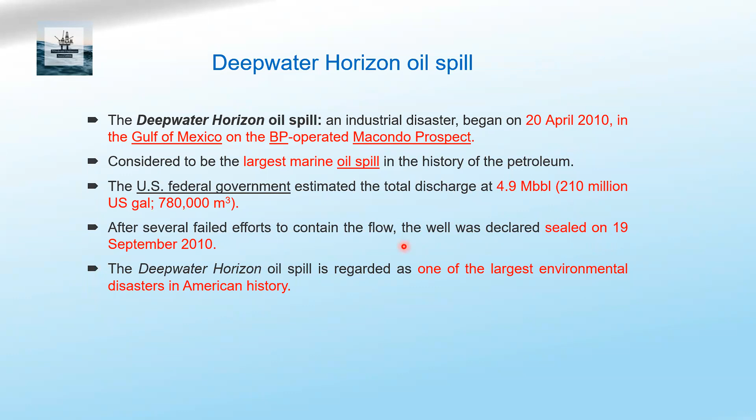And it took almost 5 months to completely seal it, and even after this, it was said that it was still leaking. But officially, it took around 5 months to control this well. Given the money, the effort and the contamination it caused, it's one of the largest environmental disasters in American history.

And so what went wrong? There were various reports that the government put into it. One of the main reasons was the defective cement on the well. I'll just come back again to the previous slide. As I mentioned here, one of the reasons for a good casing is to protect, and the cement is to protect the communication between the hole, or between the well, and the formation. If the cementing is not done, if there is a leak, then this is one of the reasons that could have led to that blowout.

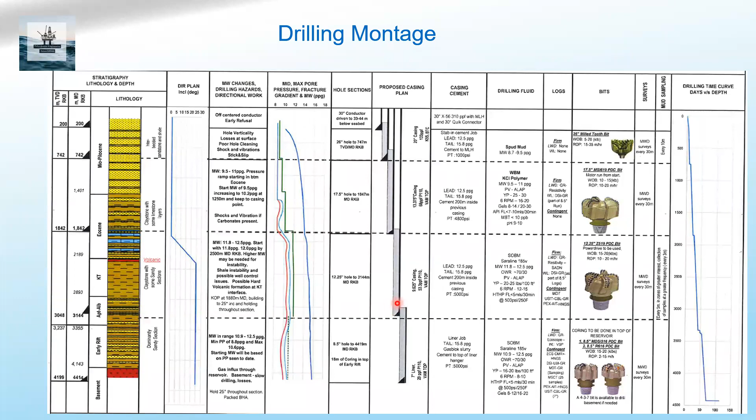There is a certain cement setting time. Once the casing is done, once cementing is done, depending on the temperature, depending on the grade, there is a certain time which we normally call WOC, wait on cement. That cement should not be disturbed until it is hardened. So there is some procedure that has to be followed. That was one of the reasons that was pointed out.

Second is also on the operator Transocean, which was the rig, and contractor Halliburton. Why the word Halliburton here? They were doing mudlogging. So you might have seen the report, you might have seen the chart. There was also some communication gap between the drilling crew and the mudlogging crew while monitoring it. There was some complexity in monitoring it, transferring of the mud during all this influx. So certain SOPs, the standard operating procedures, were not followed. So it led to a lot of confusion, which also resulted in the failure to recognize it at that particular moment and take the necessary action at that particular time.

Apart from all this, we had a fatality of 11 workers whose lives could not be saved during that blowout evacuation, with 126 crew members on board. So unfortunately, we lost life, we lost assets, and we caused a lot of contamination in the sea or in the ocean. And the penalty given was around $20.8 billion. This is the largest corporate settlement in United States history. So what did we learn from here? What did the industry learn about the different procedures, the government guidelines, strict following of the guidelines, and not compromising on the SOPs?

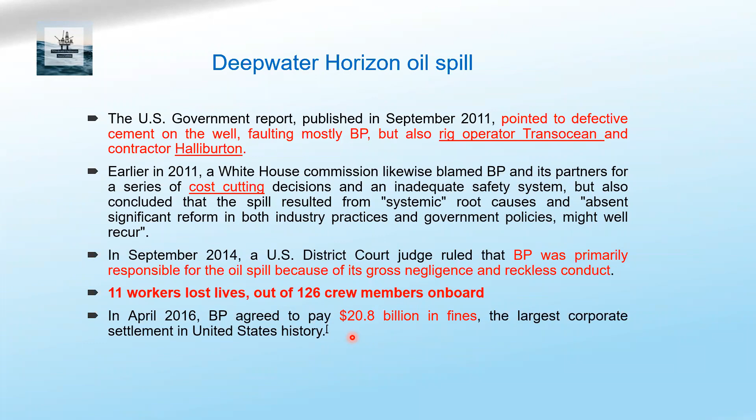So coming to this, why I have mentioned this is what impact, what a big role it plays in closely monitoring it. So talking from the mudlogging point of view, what the mudlogging company has, and what a big role it has got in terms of safety of drilling the well. This is one aspect. The second part is about formation evaluation, which means the collection of the rock cutting samples as we drill, the correct way of collecting, sampling it, the correct way of washing it, analyzing it, reporting it. This has a very big role for the company.

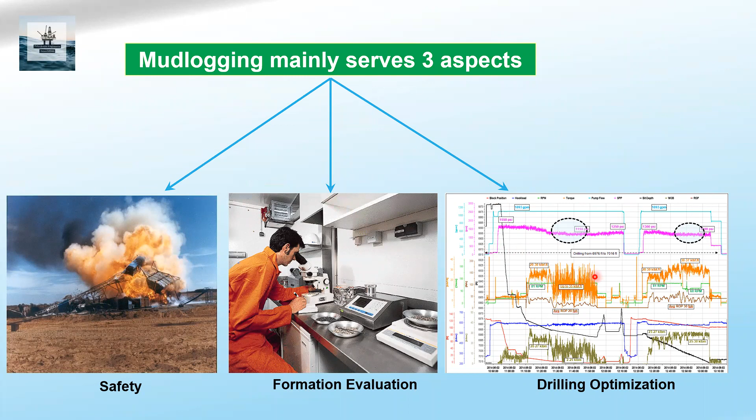The next one is about the monitoring of the well, which again relates to safety, the close monitoring of it, and that also helps in drilling optimization, which means not cutting, but optimizing the cost. So mudlogging plays a very important role in terms of safety, formation evaluation, and drilling optimization. So I will not be explaining all the details about mudlogging in this very short webinar.

But the main thing is, to begin with, some beginners might get confused: what is mudlogging? It is not logging of the mud. Logging means continuous monitoring of the data, and recording and analyzing it. So we are not talking about mud. Mud is actually the drilling fluid, but we are using this medium to get our information about the well. So mudlogging has to do with geological cutting analysis, the acquisition of data with the help of surface sensors, acquisition, recording, and analysis. And the third one is gas analysis, the gas detection analysis, or the recording of the gas. Mudlogging is the only service company at the drilling site, onshore or offshore, that does the recording or analysis of the gas. So these are the very basic key things about mudlogging.

Now, to give a quick picture, from a very conventional mudlogging unit to a combo unit: this was one of the jobs in Rajasthan, where I worked as a well site geologist, and we were sitting in the same unit with the mudlogging and the directional driller, the MWD and LWD. So this was like a control tower of the well, where we could see everything online, where we could see how the plots are. I'll be sharing some of the slides, some of the charts later, how exactly it looks and what is important while monitoring the well.

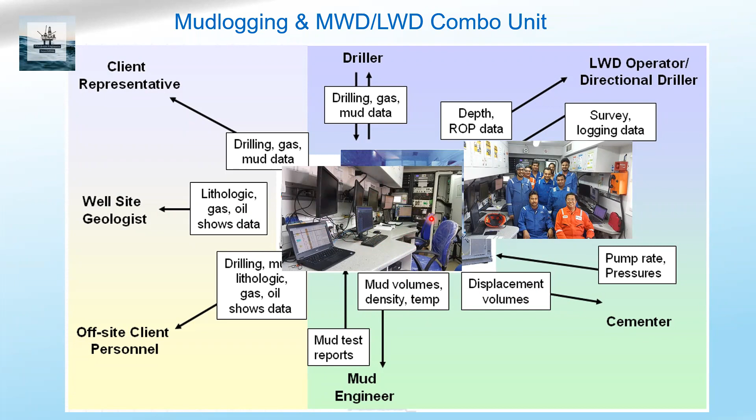So in fact, they are the crew who have to interact with the different parties at the rig site, like the well site geologists on anything they see, like cavings or any abnormal cuttings at the shakers, and with the mud engineer on any changes in the pit volume, whether there is any transfer or decrease or dilution. So that is why it is very, very important. They are the eyes and ears at the rig site.

A very brief explanation. The mudloggers use different surface sensors installed at the rig floor. For example, the drawworks sensor for monitoring the depth and the hook movement, the pressure sensors, the sensors for the pit volume at the pit room, for safety the H2S and CO2 sensors. CO2 is normally in the mudlogging unit, and the mud weight or density sensors at the shaker area or the pit room.

So these different sensors get a signal, which then goes to the data acquisition in the mudlogging unit. There are different ways. I myself have seen different stages of acquisition using different panels. Whatever the development, the important thing is to convert the sensor signal, and then with some calculations get the data plotted in real time, time based or depth based, and transmit the same to town as well, so that whoever is at the remote site also can have it in real time.

For example, when we were monitoring the Gulf of Mexico wells, we were based in Houston, or when we were in KL, Malaysia, drilling offshore in the South China Sea, and we could see the data in town itself. Any abnormality we could see from town, and all the reports were also backed up at the same time for any future reference or analysis.

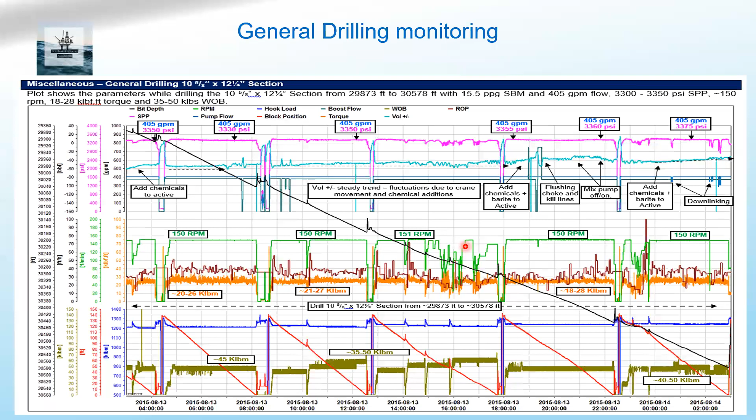Okay, so these are some of the charts. There are various charts. I'm not going to extend all that. Here, I'm going for a little advanced applications. Not all mudlogging companies provide this, but some of the mudlogging companies in their advanced service provide this, and this is particularly again from the Gulf of Mexico operation. I was there myself. This is from 2015.

So flowback fingerprinting. This is the automated one. I have also worked with the manual one, that was in Malaysia. It's a lot of pain. There is a lot we have to enter manually, and it's a lot of pain. And that was in the earlier version. But now I'm not sure how many companies, but many companies do have this.

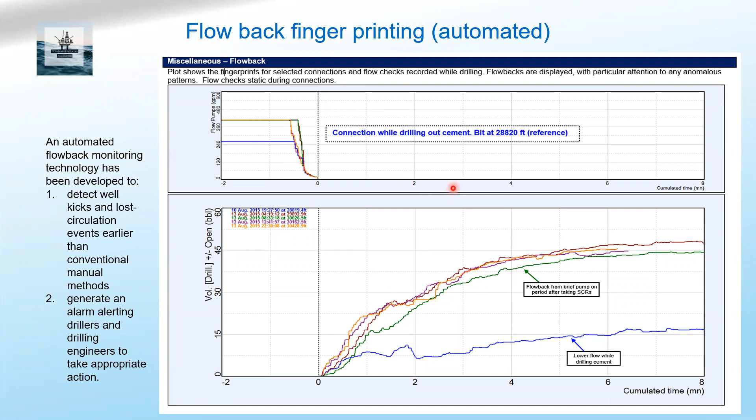Next, and this is all automatic, but some setting has to be done in the system. The next one, again, this is one of the monitoring torque and drag for the hole cleaning. Again, this is from one of the wells that I worked myself, and you can imagine how much data had to be entered here to get it plotted. This was like hell, to spend a lot of time in this.

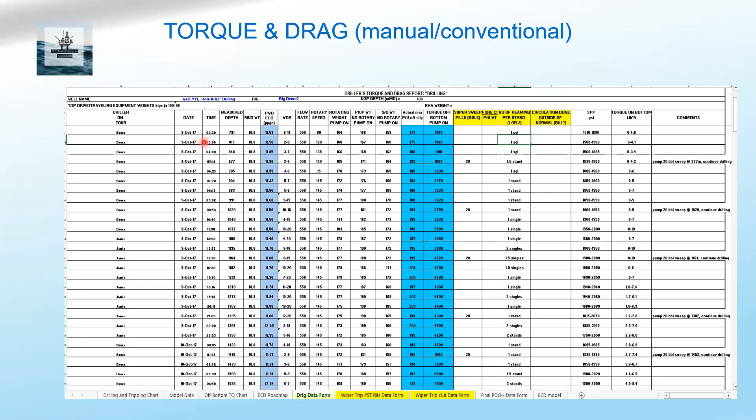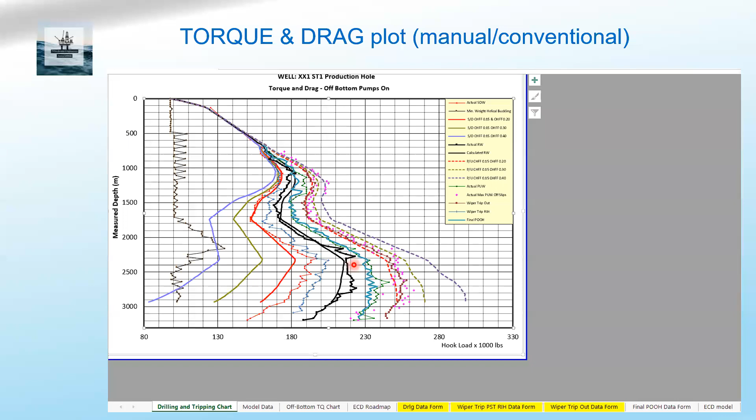Then the output is something like this. It's not very user friendly. It's not very easy, and a lot of effort is also required. But by using this advanced system, which we call Thema, when I was with the other company, it's all automatically plotted. Of course, we had to do some modeling of the well while running. We have to prepare the model, and it's very helpful. We can do a lot of analysis here.

For example, here, this is the depth, and this is the pick up weight while picking up. If there are any issues with the hole, if there is tight hole, of course there will be overpull and so on. Then the weight will be more. So from here, one can roughly say that it was a clean hole. And then this was the hook speed. So this analysis we can do for tripping in, tripping out, drilling, rotating, and so on.

So with this, one can help. If there is any issue, it will be notified immediately, and we can do the preventive measure before it is too late. Those who are in the industry will understand how much cost or how much headache it can be once we get stuck, if the hole is not clean. So it is very, very important to make sure that the hole is clean while drilling or while tripping in and out. If not, then there are different procedures or steps to be taken to clean the hole. Okay.

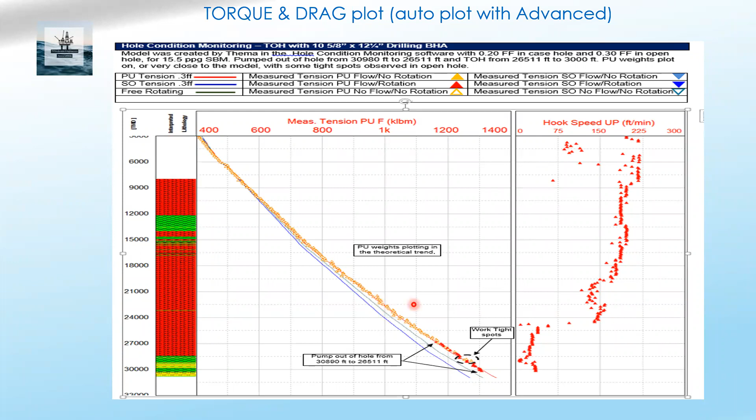I just wanted to highlight the traditional or basic plot of the leak-off test or the FIT using Excel manually. Again, this is from a very recent well, 2020, last year, I think. Although we have a good advanced system, some of the clients and contractors are still using the traditional way of Excel. So there are a lot of disadvantages of using Excel. There's a limitation, there is manipulation, doubts arising out of such manual work.

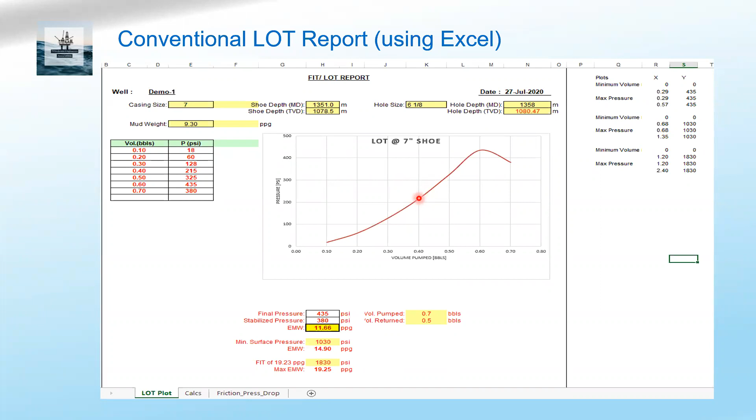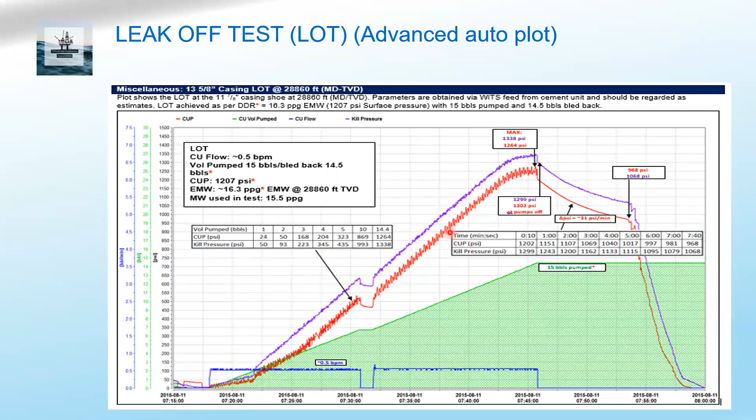So if we use the system generated one, it is much more informative, much more information it can give, and there is no chance of manipulating it. This is also from a well where I was involved in the Gulf of Mexico. You can see here we can use different parameters, different sensors to plot it: the cementing unit pressure, kill pressure, and when you stop here, how much it's taking. With some manual input you can give more information, and you can plot it in different ways very easily. And that was leaking, so it was an LOT.

Prior to that, we do the casing pressure test. It is also very important. For example, in that Gulf of Mexico incident, I'm not sure whether they had done this test; I did not go through the detailed report. If done after casing and cementing, this will tell whether there is any leak or not. So this is very, very important. This was from a well again in the Gulf of Mexico, in my time, after that incident. The client was very, very strict. This plot we had to submit within an hour after the operation.

In that Macondo well, I'm afraid it would not give this result. That means the pressure was holding here for how many minutes and so on. So you can see here it was pretty good. Only then was the client convinced that yes, the casing cementing is good, we can go ahead. Just to give you an example of how important it is.

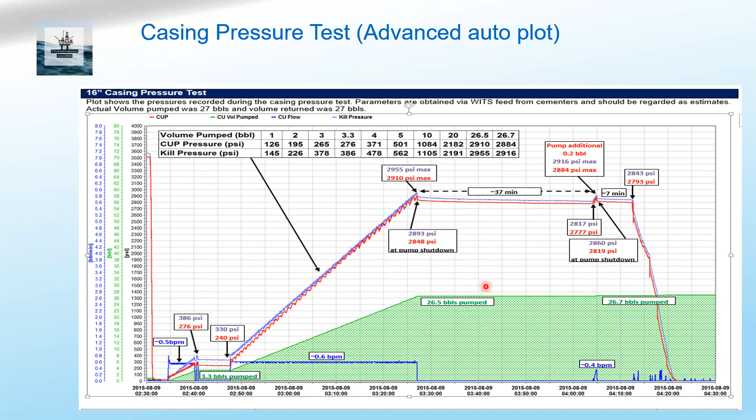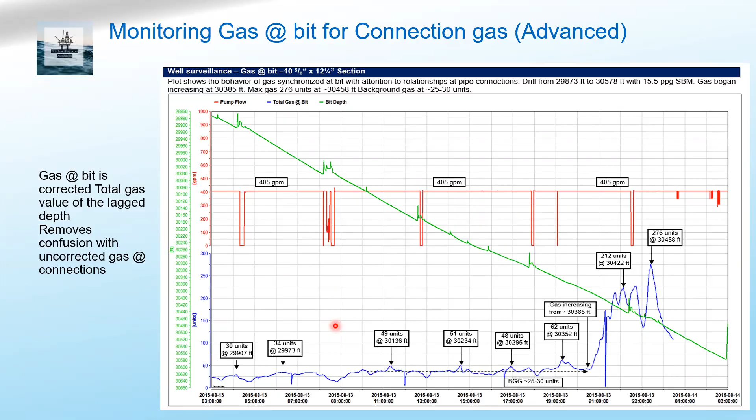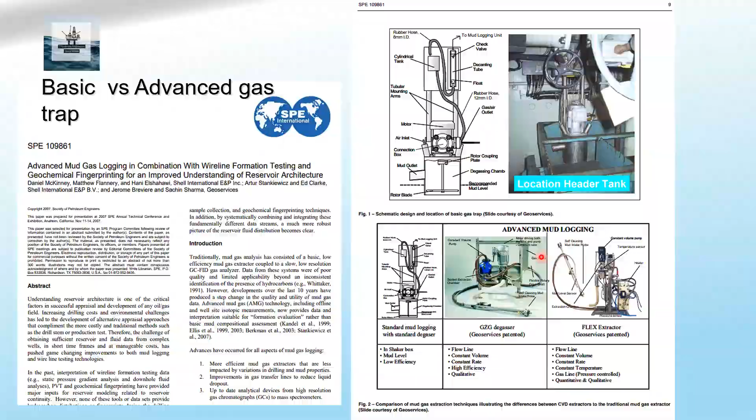Before we go ahead, carbon has two isotopes, C12 and C13. So in this methane, what we do is this isotope logging tool runs continuously and detects the C13 reading percentages continuously, in real time at the site. So we are able to help in reservoir characterization and to study the geochemical properties continuously.